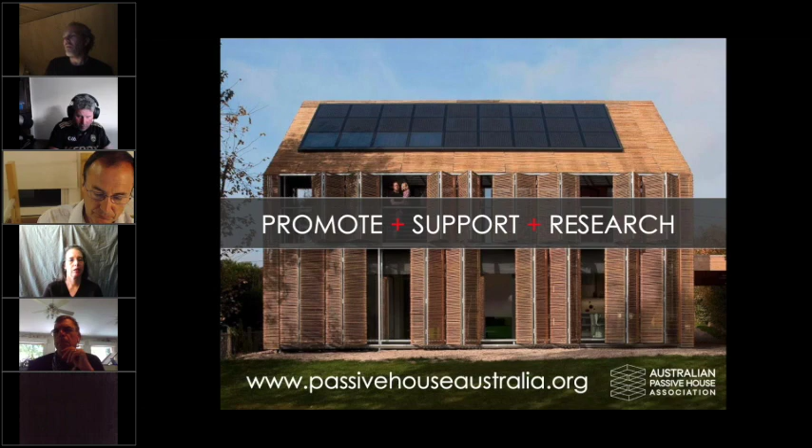I'm going to be, as you can tell from the title and slide, talking about Passive House, what's it worth? And I'll explain shortly what that's really going to be about. So my name's Andy Marlow. I am one of the directors of the Australian Passive House Association, as Georgia mentioned. We're the Australian affiliate for Passive House. I am also an architect, and this is our architecture company.

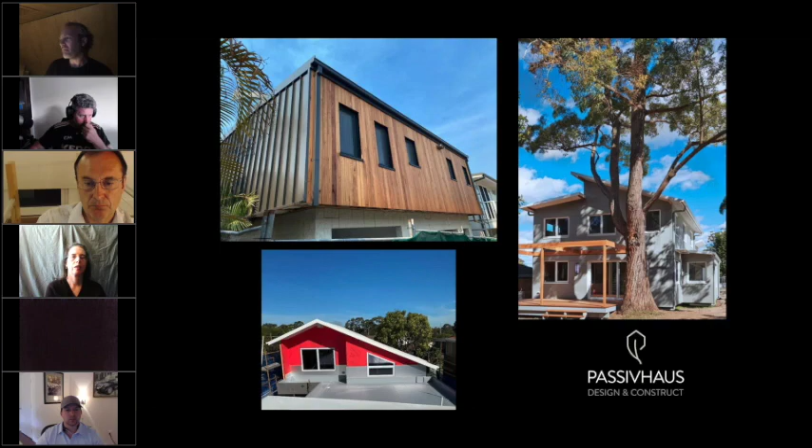We've been around for about 20 odd years, and in the last few years we've become deeply involved in Passive House. We have also recently, as part of our embracing of Passive House and just building better, formed a new company with some builders that we know called Passivhaus Design and Construct. And it's fairly unique in the Australian market at the moment in that we only design and build certified Passive House buildings. If it's not certified, we don't go anywhere near the project. And that's a new company, a few months old and going fairly well for a company that's a few months old in the middle of a pandemic.

So what I want to talk about today is actually the house on the right hand side there. It was the first certified Passive House in Sydney, and it was our first certified project. And it's actually a journey through the cost of these things. I'm sure it's no different anywhere else. There's a large amount of concern about the cost of building better buildings. And everyone thinks they can't afford it.

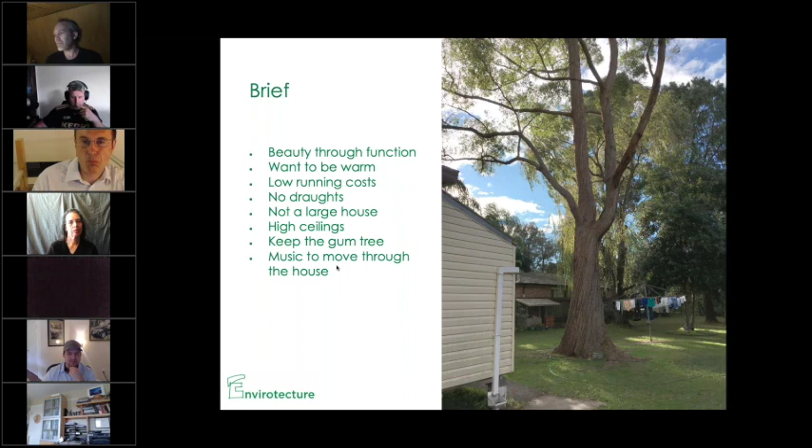Anyway, the journey of this talk and this project is that it started off before we knew anything about passive house. Our firm, as you could probably guess from the name Envirotecture, has always attempted to blend environmental things and architecture into one cohesive whole. And therefore, our default approach was what we call traditional passive solar design. Obviously, a huge number of parallels and a few key differences with passive house. So we were always designing buildings from that perspective, and this project, like all of our other projects back then, started off in the same way.

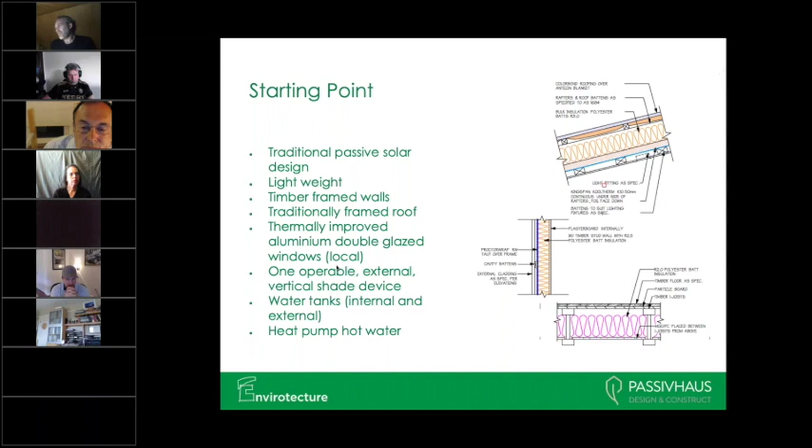So you can see on the screen the construction build-ups that we were looking at. Nothing wrong with most of them. The foil face blanket in the roof is a thing that we don't use anymore. But most of the other aspects of the design and even the construction on the whole are fairly robust.

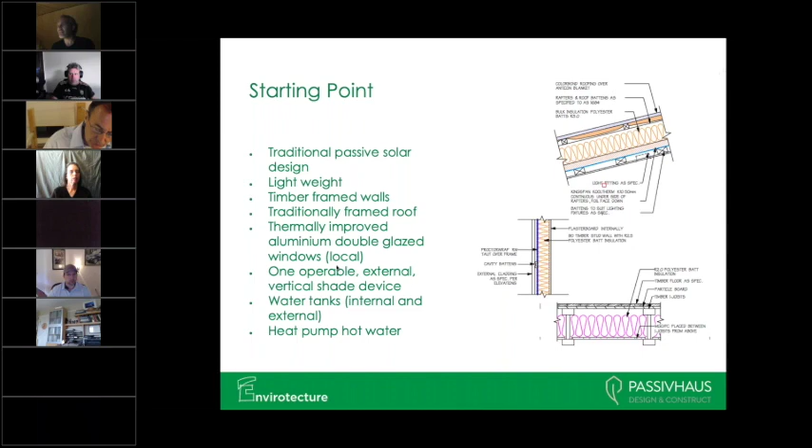And the great thing about the project, and why it's proved to be a really useful case study on cost, is that we designed the building envelope and its geometry very early on. As you'll see in a sec, it's heavily constrained, which is, like I said, a blessing and a curse. But it meant that as the project evolved from passive solar to passive house, the geometry never changed. So it's proven to be a very good case study. My partner's an academic researcher, so the consistency of the data and the baseline, I understand from her, is very pleasing.

The one thing in my world of passive solar that everybody gets very hung up about is thermal mass. The tree on the site meant that we were unable to use a concrete slab, which is our default, fairly cost-effective way to get thermal mass into a building. And for a very long time, I'd always been pleasantly surprised and mostly just impressed by the fact that water has a greater heat capacity than concrete by a factor of about 2.

He has not yet put food colouring into the tanks. Lots of people have asked whether he's going to put fish in the tanks. The answer to that one has been no. But apparently the food colouring is probably going to happen at some point for a party or other.

So this was our strategy for putting thermal mass in. It ended up being, in terms of passive house, that we could have taken it out and it wouldn't make much difference. But due to where they were in the building, their function architecturally as a screening device and a framing device, but mainly just because everybody kind of liked them, they didn't get taken out through all the cost stuff, which I'm about to start talking about.

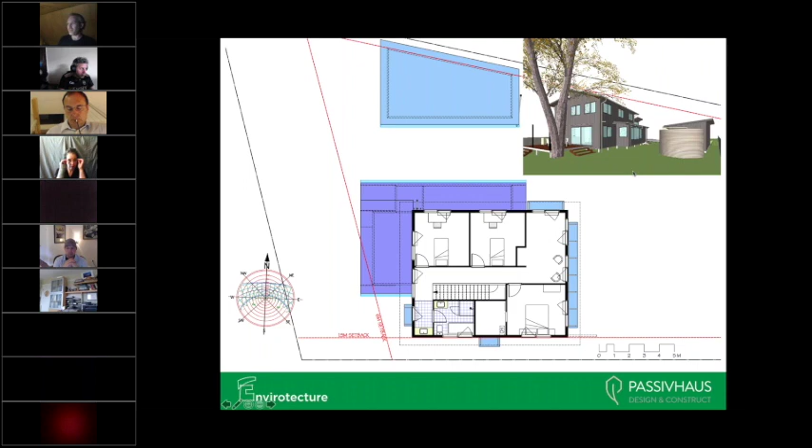You can see the little perspectives in the top right hand side of the imagery, so you can get a sense of the building form. It's fairly simple roof forms, which obviously is good from a cost point of view. And you can see some bolt-on shading that we have over these north-facing windows. We're using the eaves on the upper level. You can't really tell on here, but you'll see later. There's an external blind mounted on this big northern window over here, which is downstairs and is the one that basically gets the sunlight into that water tank.

So this is really about the money. So let's talk about the money. This project ended up getting priced by several different builders using several different construction approaches, and all of them kind of led us to learn a little bit of something. So builder number 1, my note over here, promised the world and failed to deliver. This was a guy who was at the time getting stick frames pre-cut in a factory, but still assembling on site, and was claiming that this was the most cost-effective way to get things done. So this was on-site construction with an element of prefabrication. At this point, it was not intending to be a passive house.

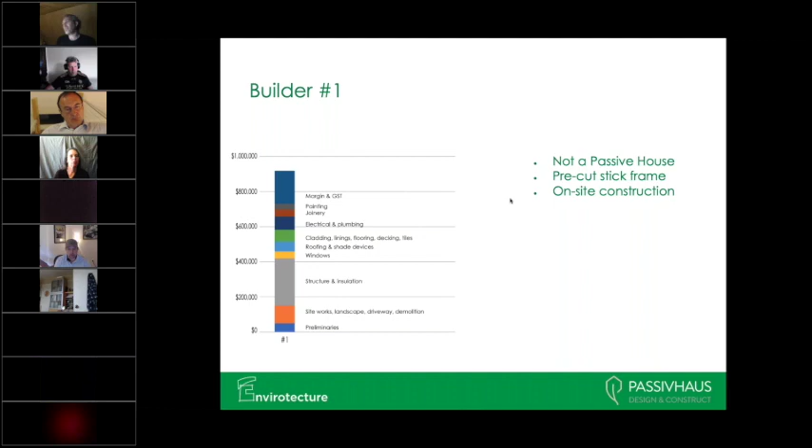Anyway, so this is builder number 1. So promised the world, told us it'd be a whole lot cheaper than the $900,000 it ended up being. So that didn't go particularly well with the client because he'd pretty much lied to our face.

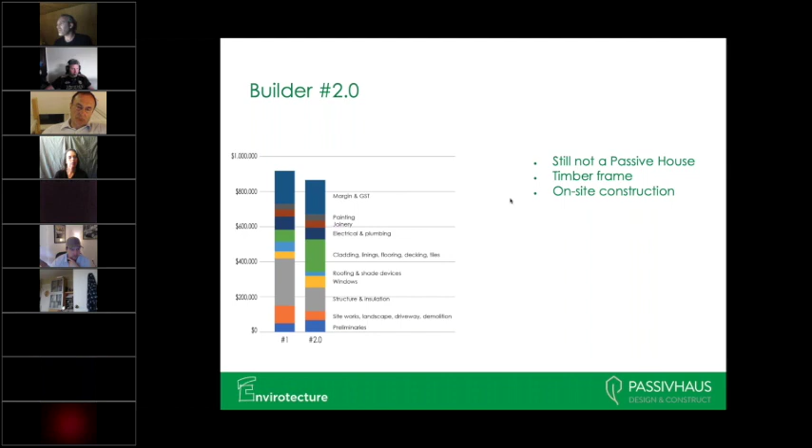So we move on to builder 2.1. So same guy as number 2, but this is the point at which we've realized that passive house is the best solution that we've got. We've changed the construction approach. So we've moved to trying to use some off-site panelization. The builder by this stage has become a certified tradesperson, so they've got an idea about what they're getting themselves into, but they haven't yet built one. So we're doing a bit better in terms of being prepared and having a robust approach. And as you can see, the cost went up a bit from where we're at before. So you could argue that that's the premium for a passive house, but we won't.

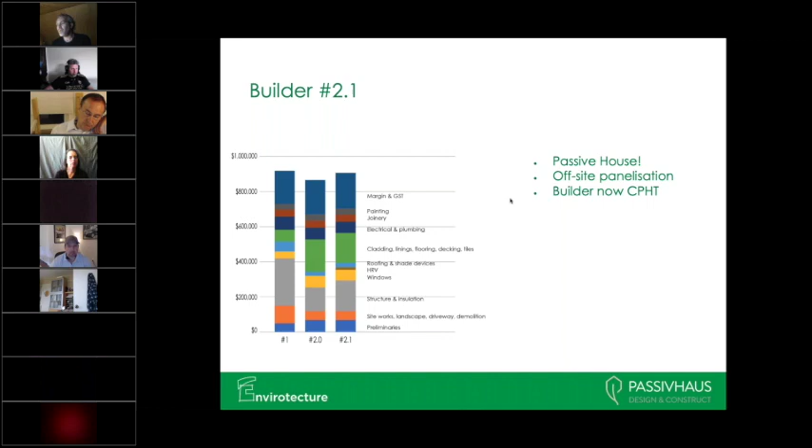I just want to take a quick sideline into the panelization. We being the people living in Australia are not particularly well blessed with options for these things. We have one person in the country of 20 odd million people who actually has a certified passive house component as a panelization product. He happens to be in Melbourne, which is 1,000 k's away, or more importantly, about 11 hours on a truck, and at whatever it is, $240 an hour for a truck and a few truckloads per building, that adds up to cost.

So we had prices from the Melbourne guy. There was someone in New Zealand at the time who was making a very similar panel product. And as you can see from the graph, the cost difference between the two was fairly negligible. We also just randomly got contacted by somebody who was bringing not just panels actually, but panels, windows, wall linings, pretty much most of the building fabric at least, out of factories in Estonia, I think it was. Who was desperate to quote one of our jobs, so of course I gave them the opportunity. So their stratospheric looking price here, to be fair, is covered a lot more than just panels.

But what was most interesting for us was that the on-site construction was still basically the same dollar cost as the panel system. So as you can see from my comments on the right, the freight was a problem. If we'd been closer to those prefab locations, the economics would have looked much better. I haven't really talked about the site access, but this house is on a reasonably busy road, and that would have meant panels would have been a bit tricky, certainly doable, but it was a complexity. And for a builder who hadn't done them before, when he ended up with two numbers that were about the same, he certainly was happier taking what he saw as the lower risk approach of just building it all on site. At the end of the day, that's what they've always done, so they don't see it as being risky.

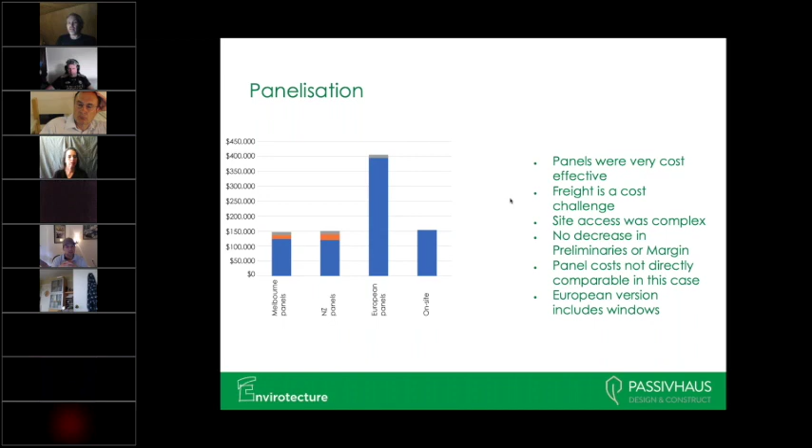So that was the story of the panelisation. That's the story of why the panelisation didn't occur on this job. The other thing that's very common in the Australian market is for people to get up in arms about needing passive house quality windows. For those of you who've never been here, our industry average window is a single glazed aluminium window.

There is a lot of low-E glass going into those these days, but that's about it. Double glazing is still, I don't know what percentage of the market, but it is still not a big percentage of the market. It's bigger in places like Canberra where it's colder and also hotter, but it's still far from the norm. So what that equates to is that good quality local windows still aren't anywhere near passive house, but they are not particularly cheap.

So you can see from the graphic the different things that we got priced. The Australian UPVC product is all imported sections and then local glass. Turns out our glass is, according to my local window manufacturers anyway, about 3 times the cost of good European glass, in particular when you get into triple glazing. So we ended up using an imported European UPVC aluminium clad triple glazed window.

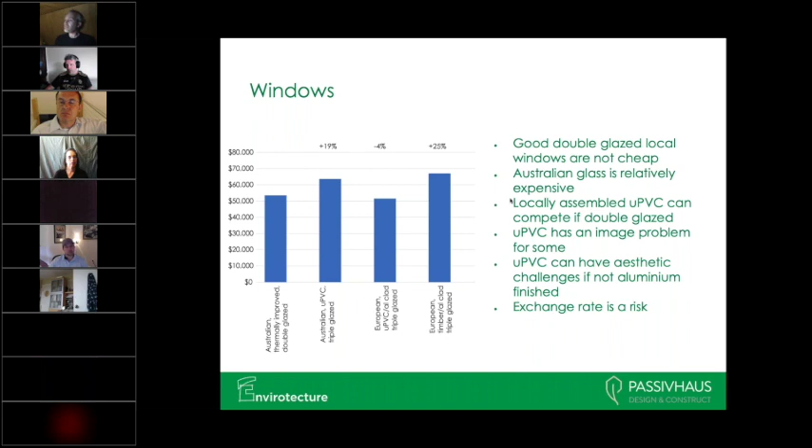So that's pretty much all I need to say on windows. So look, I guess the upshot here is that the windows we use were actually cheaper than the local windows. We've also learned a few tricks lately about how to design windows so that we need less frame and get more glass, because it's the frames that cost rather than the glass.

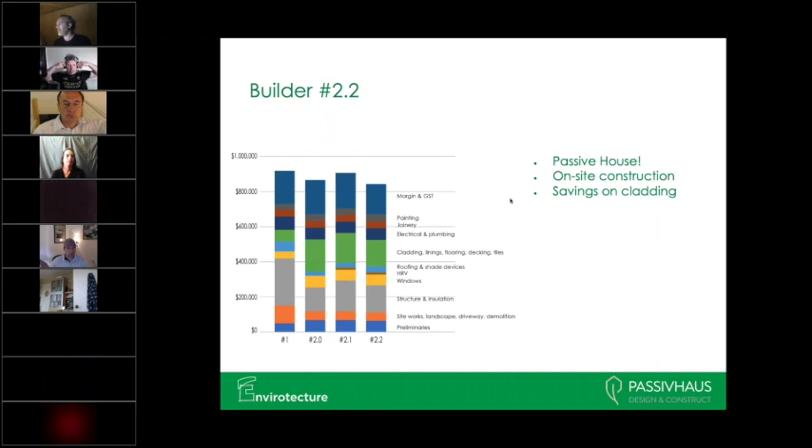So this gets us to builder 2.2. So this is the same builder again. We're heading towards certified passive house. We're building it on site, and we've come down. We are cheaper than we used to be, and we've done that primarily because we changed the cladding material. It's got nothing to do with passive house, but it's how we got the job over the line.

The client, unsurprisingly, wanted a reality check because they were the first people to get close to building one of these things, and they wanted to know if the price from builder 2 was good. We went to a guy that we know very well, and we ended up with a bigger price. And as it says on the right, there's a couple of reasons for that. He hadn't built one before, but at that time no one had in Sydney, so you couldn't hold it against him.

He hadn't done the certified trades course, which it's hard to say whether that was a key factor, but what was a key factor, and he was very upfront about it, was the risk premium. They were being contractually obliged to deliver an airtight building. He'd never delivered an airtight building before, and he vacillated in conversations between, it looks so simple, the detailing's so great, how could I get it wrong, to, oh my God, I'm scared, I don't know what I'm doing, let's just load it with dollars.

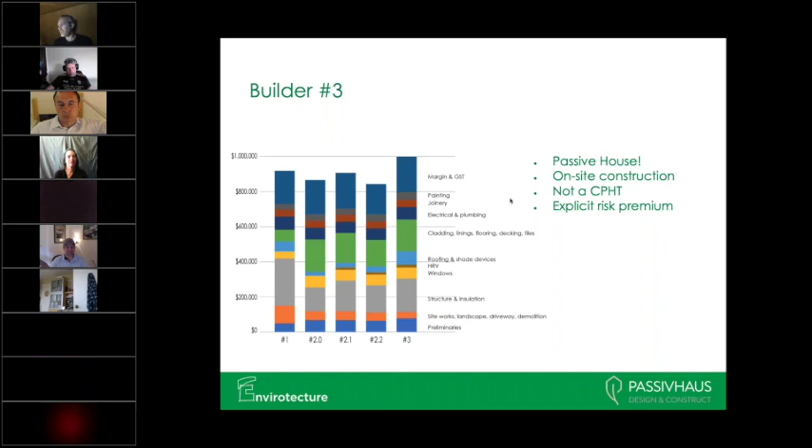And as you can see, there ended up being a fairly hefty loading in there by the end of the job. So, all that said and done, what does all this really mean? So, I'm trying to get to the bottom of the question, what does my passive house cost me over the norm? These are the elements that are actually related to passive house as opposed to building a building. So this is the structure, the insulation, windows, HRV, the roof, and the shading device. So basically everything, all the thermal envelope stuff, including the shading, which is incredibly important in our climate.

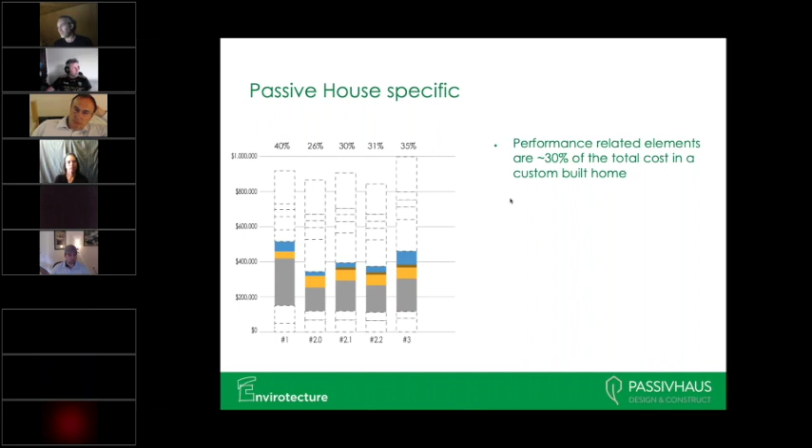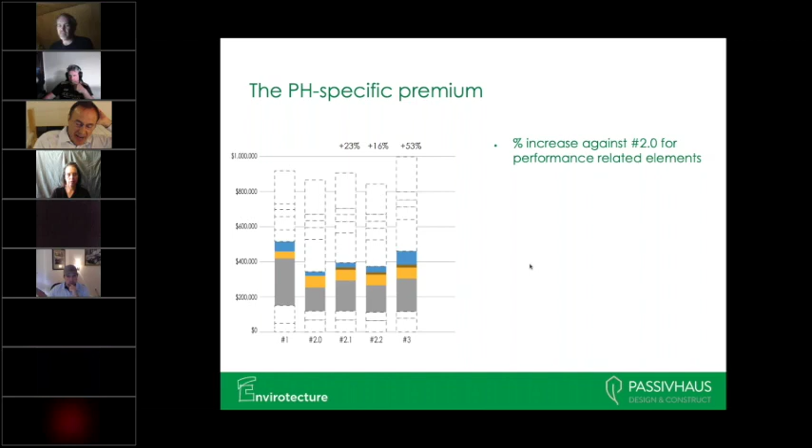So you can see from those percentages that give or take about 30% of the cost of the building has anything to do with its performance. The rest is, you know, lovely things like bathrooms and kitchens. So what's the premium? Well, obviously it always depends on your baseline, but based on the numbers we've got, and based on the fact that, and I should say explicitly, we ended up building effectively version 2.2, we're looking at about a 16% premium for the things that make the building work. So if that's 16% of our 30%, that's not even 5%. So that's sort of the premium thing. That's where we're looking at.

Now, these numbers are the dollar differences based on version 2. So this was the first builder who really kind of got his head around the project. We're looking at a dollar increase, or a dollar decrease actually, in the one that we built of minus $22,000. And this, again, like I said, had a lot to do with changing the cladding, but we've obviously added in, you know, the walls were built differently. We've got an HRV that we never had in the original design. So we've added stuff in, but we've also taken stuff out.

And one of the key lessons that we use when we're talking to clients, and I'm assuming most people today are in the professional bucket rather than the client bucket, is that these guys made a series of decisions in the process in order to get the building to a budget they were comfortable with. So right from the get-go, deciding that an ensuite wasn't necessary to them saved them probably 15-ish, maybe a smidge more, thousand dollars just in fit-out costs.

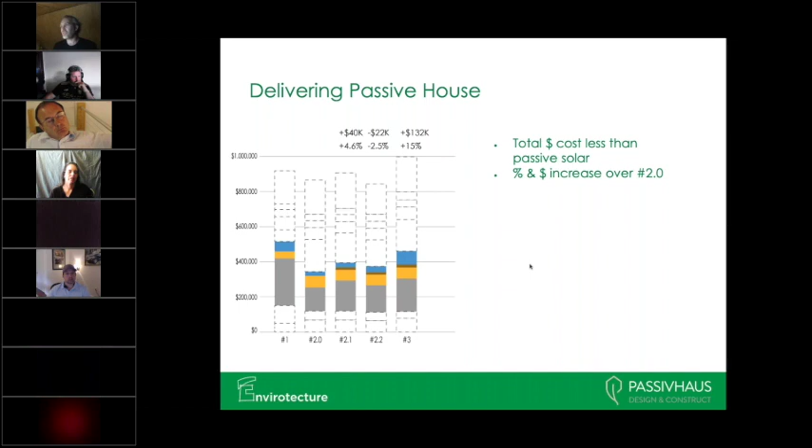So they made the right choices, and part of this talk when it was very first conceived is around the fact that lots of people believe they can't afford a certified passive house, and I'm fairly strongly of the belief that actually lots of people can. Not everyone can, not in the Australian world at the moment, but lots of people can. It's just a case of making the decisions that help that process. And as you see from these numbers, 30% of the building is to do with its performance, which means that the other 70% is stuff that on the whole is less impactful. And therefore that's a lot of room to move in if you want to focus on thermal performance and high quality outcomes. So those are those increases in both percentage and dollar terms across the whole project.

Now, just to throw a lovely curveball in, right at the very start of this, we actually went to not quite what we call a project home company. So depending on where you are in the world, volume builder, but we call them project home companies. We went to these guys. They were small project home people. They were keen to do something. They were willing to do something that was custom designed. So lots of those guys won't touch that sort of work because they have a formula and custom design isn't it.

So they quoted the job. It was the original non-passive house design. They had some exclusions in their price, which were definitely going to add money. We had concerns over their ability to deliver the quality we needed anyway. But they gave us a price, and as you can see from the graph, it was a fair bit lower.

When we came to make it certified passive house, they, in the end, very politely refused to tender. And from what we could deduce at the time, it was around the requirement to deliver the airtight building. They'd initially made all the right noises, as people do when they think you're going to spend hundreds of thousands of dollars with them. But it turns out that actually, no, they weren't really willing to go down that road.

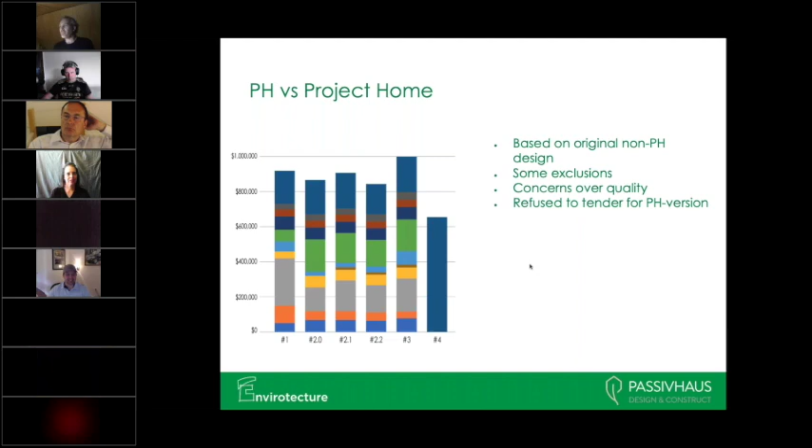So I'm just going to quickly show a few pictures because the building is finished, and then I'll get to some conclusions. So this was finished almost a year ago, so August last year. These were taken before they moved in.

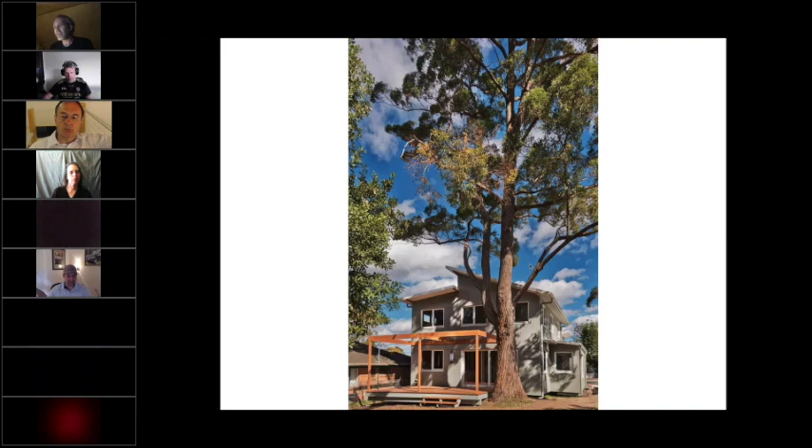So as you can see, the tree has remained. The tree is still very healthy. If the tree ever dies, there'll be a lot of very annoyed people. But you can see from that image how ridiculously close it is to everything. And you can see the house sort of levitating over the ground. But the landscaping is done. It will be looking much more integrated than it does right here.

So these are our lovely imported windows. It was the first time we'd imported windows. We used a SIP panel roof, which again, our climate is very kind to us that we can use those roofs and not introduce a condensation risk at the wall roof junction. So there are some things in building in Sydney that are particularly helpful that are due to our lovely climate.

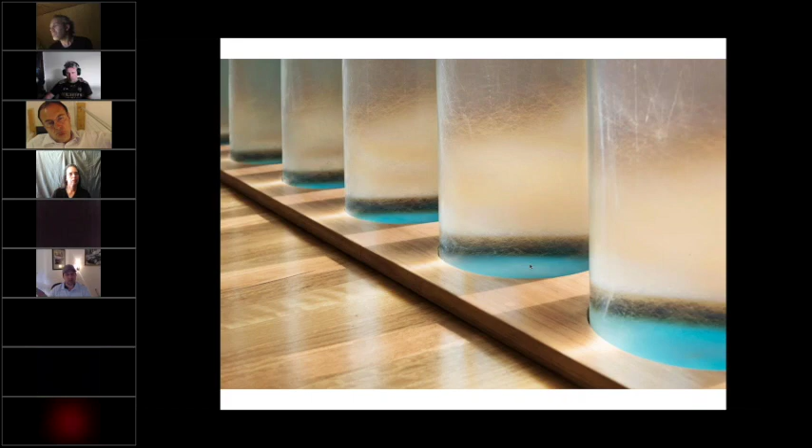So look, conclusions. When you're comparing costs and looking at Passive House, especially in a fledgling market, the cost premium on a project home is possibly 30%, but to be honest, it really doesn't matter what that is because those people cannot and will not build them. They don't have the skills, they don't have the supervision on site, and their business model is just not geared to delivering airtight, high quality homes.

So it really doesn't matter what that percentage is. It could be zero. They just can't actually deliver the projects at this moment in time. And that's incredibly sad, depressing, and yet also an area that is ripe for change. We firmly believe that the cost premium is almost non-existent with good design, assuming you're in custom build territory to start with, and with what we call strategic decision making, which you could just call not spending your money on fancy stuff you don't really need.

The additional window costs are minimal, and again, through good design, we've learned how to do that better since. So like I said, basically frame bad, glass good is pretty much the mantra for us on that front, and just less windows. The cost savings for prefab are location dependent, but we have managed to, as I've said before, work through issues around preliminaries decreasing to reflect an increase in speed on site, and also a revisiting of how margins are charged on very, very large amounts of money.

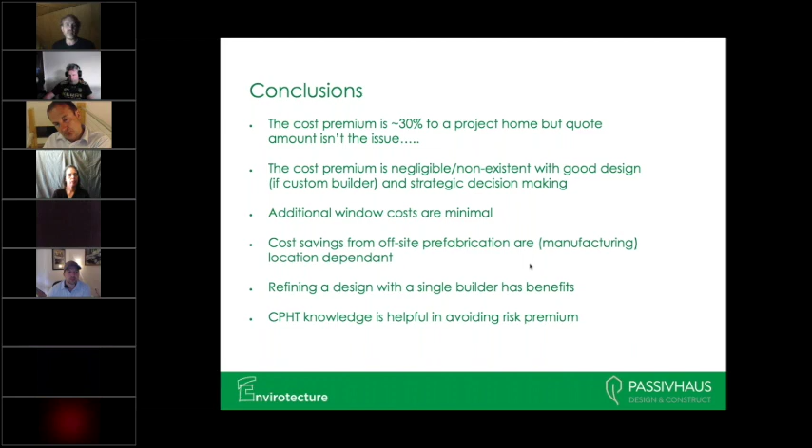And on that note, after I don't know how long I've been talking, I will wrap up and take whatever questions there are.